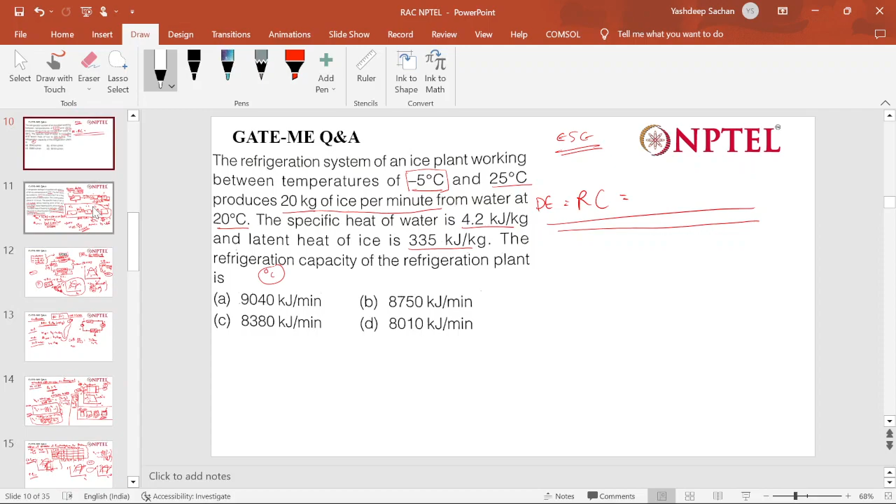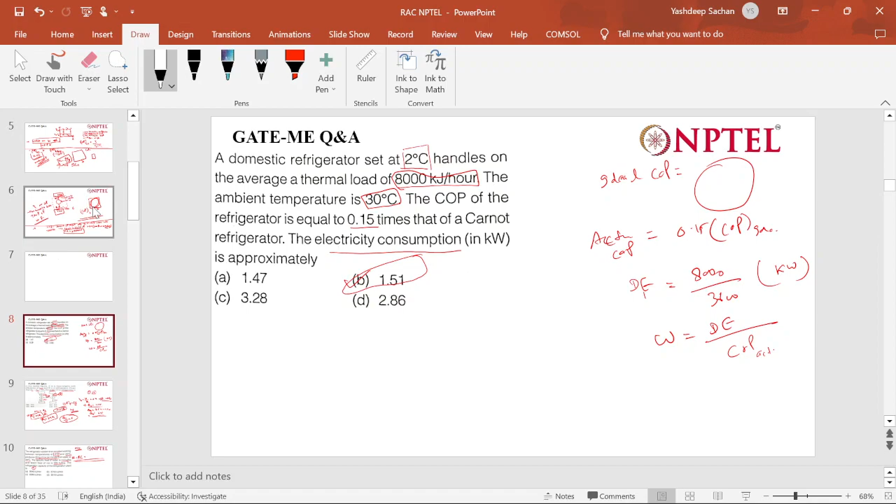Okay, so I will try to summarize quickly. So in the first three classes, what we have done in RAC: in the first class we started with the basics of refrigeration, then saw the Carnot refrigeration, ideal refrigeration cycle, and solved a few problems based on the refrigerator. Then the heat pump coupled with the refrigerator; that problem we solved.

After that it comes to the vapor compression refrigeration system, and there we have seen first the components of the refrigeration system, then the volumetric efficiency and why it is required, the effect of various process parameters on the performance of the VCRS cycle, then the regenerative heat exchanger in the vapor compression refrigeration system, and we also solved one numerical in the last class.

After that, this is the cascade system. What is the requirement of the cascade system? Can anyone tell why it is required? To make the large pressure differences. If we require a refrigeration cycle working in a large temperature difference, right, why can we not do it in one go? Volumetric efficiency decreases drastically, because it depends on the pressure difference. We saw here it is a function of the pressure ratio P2 by P1, so volumetric efficiency will decrease.

Today we will be solving one question on the cascade system. In the last class mostly we solved questions based on the VCRS, various types of problems, right? If any problem regarding the last class, you can ask me, otherwise I will proceed for today.

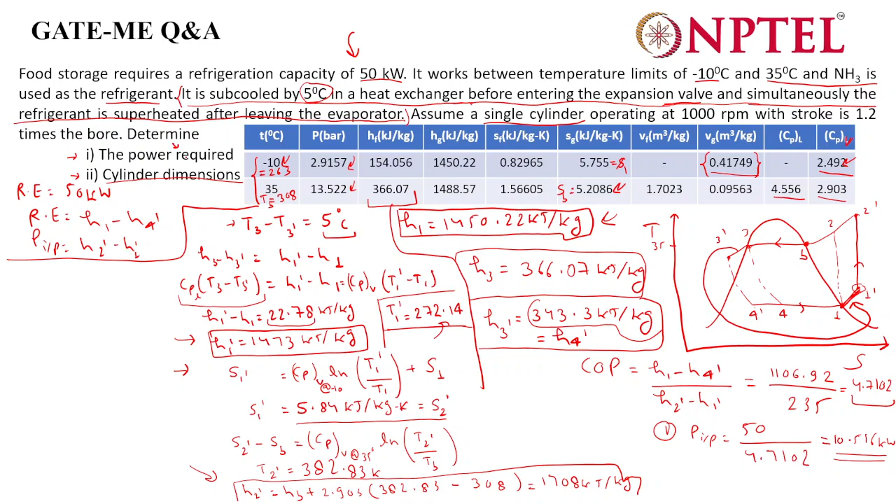In this problem, this is a regenerative heat exchanger coupled in the VCRS. There we found the power required to run the system and the cylinder dimensions. How did we find the cylinder dimensions? We took the assumption that volumetric efficiency is 1, right? Here we took this, m dot we found, and this is the specific volume at the inlet of the compressor, and the relation between the diameter and L is given. So we found D, and with that relation we found L.

Same way here, for the first part you have to take volumetric efficiency as 1. Okay. And here the clearance volume is 3% of the stroke volume. What is the meaning of this? Clearance ratio, sir. Clearance ratio C is given, right? So has anyone solved this problem? Anyone tried? Can you raise your hand?

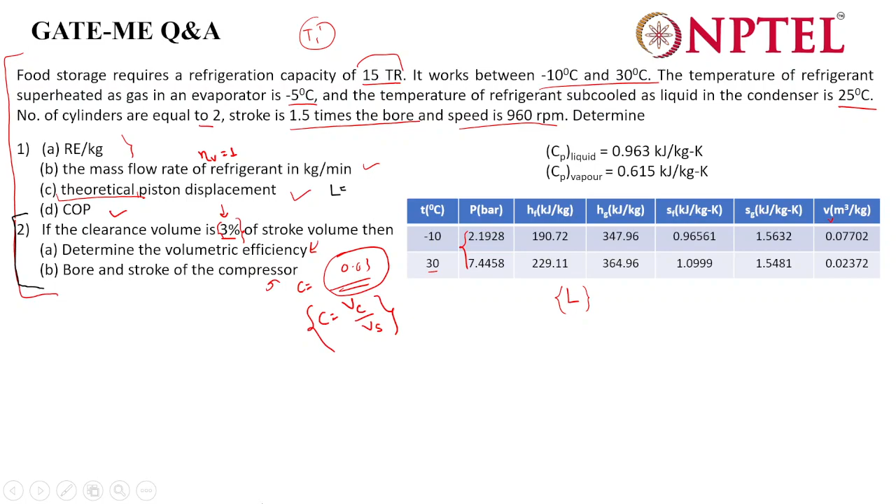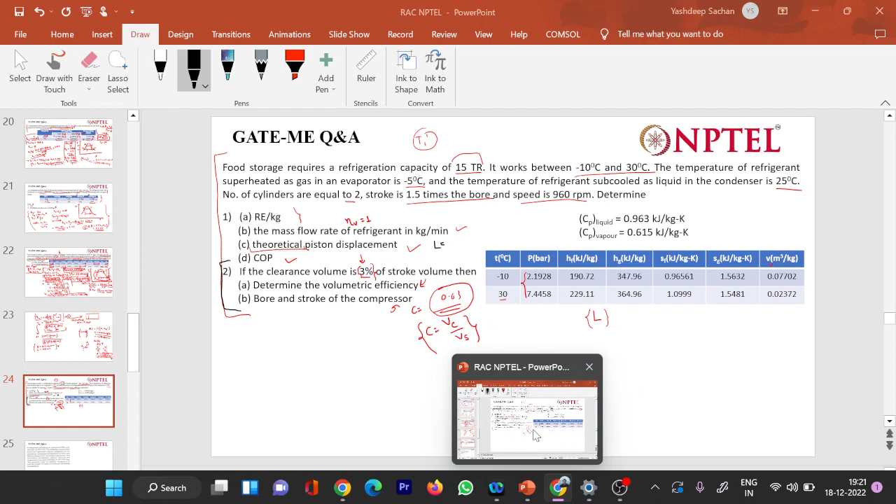So, has anyone found anything? Yes, sir. Okay, so in the first part you take volumetric efficiency as 1, and in the second part you have to find the volumetric efficiency first, because the first question is that only, and then proceed in a similar way. Should I do this problem or will you try, because it's the same problem we did here? We will try, sir.

Your doubt is what the theoretical displacement is, right? Yes, sir. If you take volumetric efficiency as 1, that is the theoretical case, the ideal, but that is never going to be possible. Sir, refrigeration effect per kg means? It means for unit mass. Simply, if this is the cycle, let's suppose this is 1 and this is 4, 2, 3. Then it is simply H1 minus H4, taking the mass flow rate as 1. Okay.

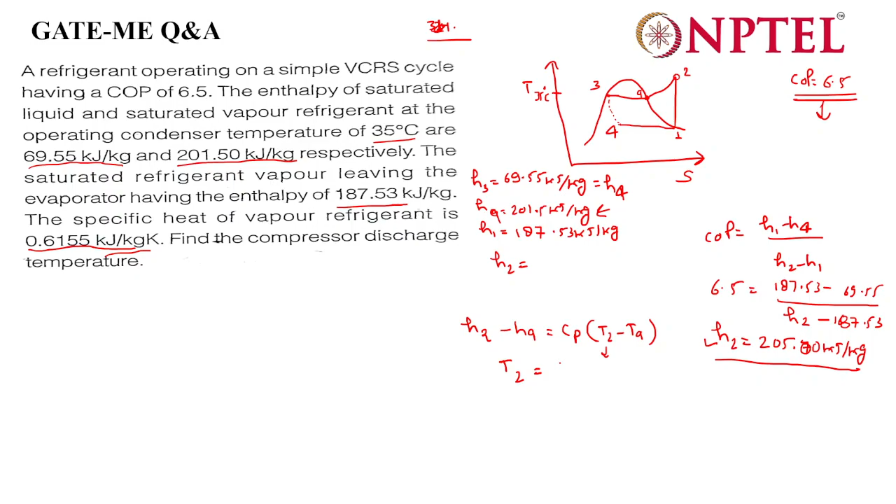314.793. Degree Celsius first tell, because we are going to put this in degree. Either you are putting in Kelvin, then Kelvin you can get. 314, sir. Kelvin. 4.8 I think, yeah. 0.8 Kelvin.

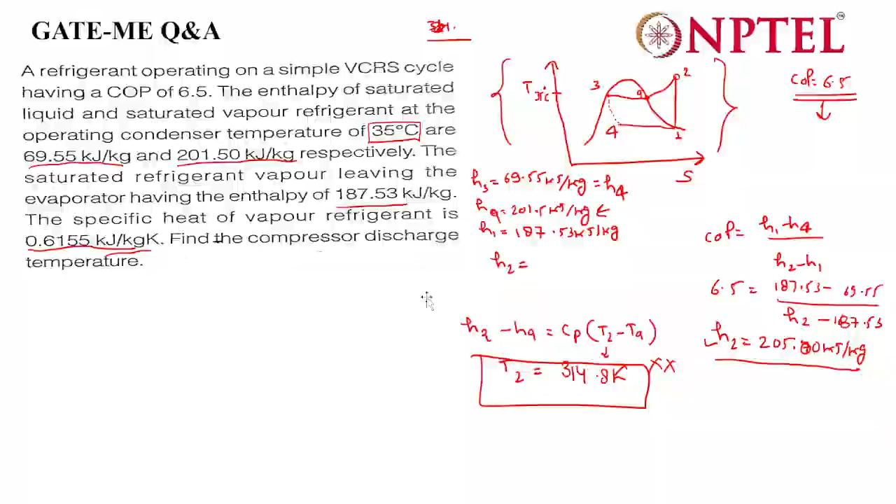So if someone is not able to get how we are proceeding, I think this is a simple problem. This way only the problem is going to come. Okay. Is it clear to everyone? Yes, sir. If anyone is having doubt, let me know. Okay. So should I go to the next problem? Yes, sir.

Just read the problem. Is there anyone who doesn't know what the cascade system is? Then I will repeat it, then we'll solve. Otherwise, this question will make no sense. One time explain it, sir. I will explain what is the cascade refrigeration system, then you try to solve this problem. Okay? 5 minutes it will take, because otherwise it is very difficult to solve it.

So first thing, volumetric efficiency. What is volumetric efficiency? 1 minus C times (P2 by P1 to the power 1 by N minus 1). This C is the clearance ratio Vc by Vs, and P2 by P1 is the pressure ratio. P1 is the lower pressure and P2 is the higher pressure, to the power of 1 by N. N is the polytropic constant. If it is an isentropic process, then it would be gamma.

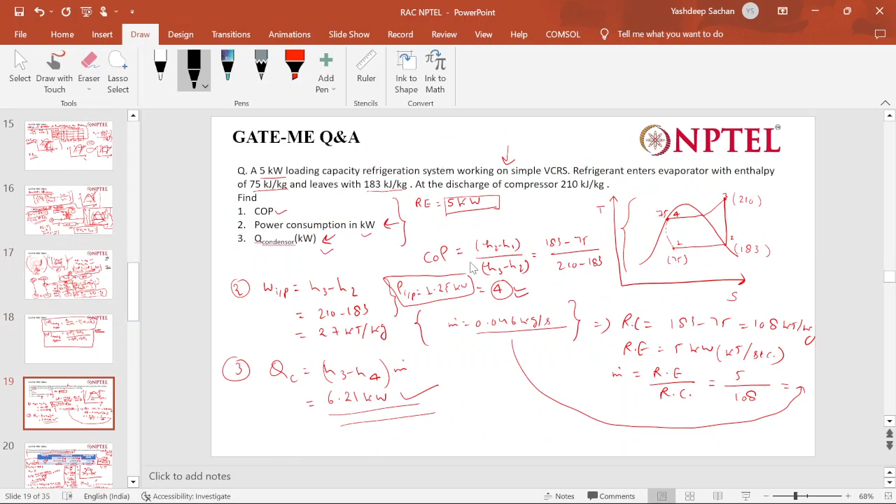Now what will happen if we require a cooling system between a very large temperature difference, let's suppose from minus 50 degrees Celsius to 40 degrees Celsius? It is a large temperature difference. In the property table of saturation pressure, at minus 10 degrees Celsius approximately 3 bar pressure is there. At 30 degrees Celsius, approximately 13 to 14 bar. So if you take the ratio, close to 4 will come.

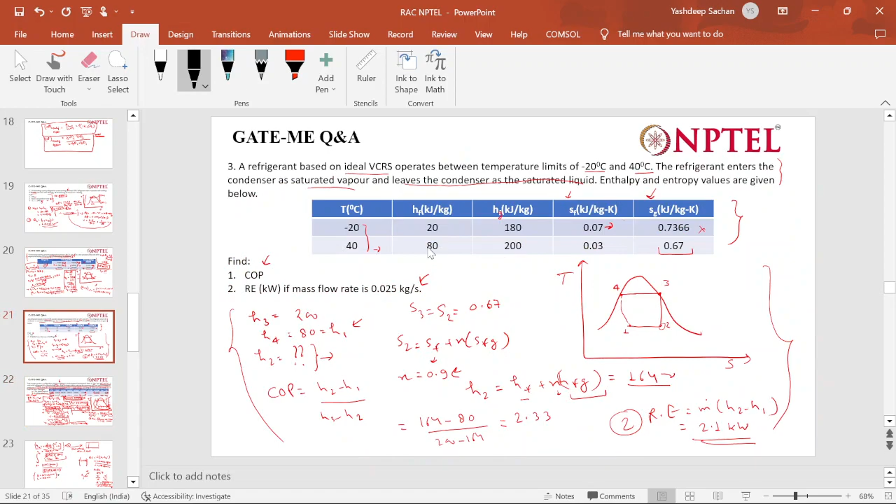And when this temperature goes to minus 40 degrees Celsius, this pressure would reach 0.5 bar. Then this ratio would be very high. In the volumetric efficiency you have to put that ratio, and then volumetric efficiency will decrease drastically. At some point volumetric efficiency would be even zero. That we don't want, otherwise no cooling would be there. So in order to avoid that, we will divide our system in two phases: let's suppose one to minus 10 degrees Celsius, and then minus 10 degrees Celsius to 40 degrees Celsius. Two parts will do the refrigeration. Is it clear?

Yes. Not clear, I will repeat some important part again. If anyone is having a doubt, let me know, then we'll start that problem. So here, simply, we are dividing one refrigeration system into two refrigeration systems. One from minus 42 to, let's suppose, minus 10 degrees Celsius, and minus 10 degrees Celsius to 40 degrees Celsius, instead of going from minus 42 to plus 40.

Clear? Is it clear to everyone? Hello. Okay, sir. So now, keep this formula in your hand. Take a screenshot of it. If you are remembering it, then it's very good. If not, then keep a screenshot of that.

Because what is the COP of the overall system? COP of the overall cascading system is COP1 into COP2 divided by 1 plus COP1 plus COP2. So what is COP1 and COP2? COP1 is the refrigeration effect at the lower temperature to the work given to that pump, and the COP of system 2 is the refrigeration effect at the higher temperature to the work given to that system. So this is COP1 and COP2. Okay.

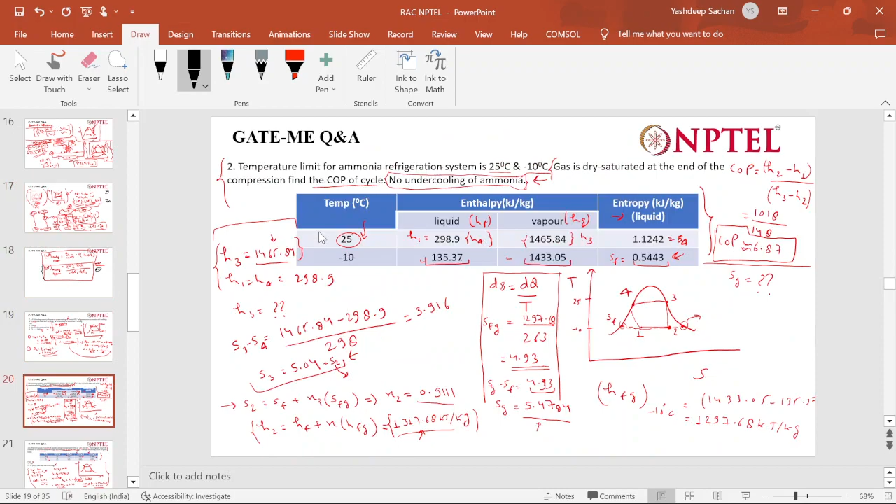So can you try this question? Just first read. Let me know what would be the refrigerant at lower temperature and what would be the refrigerant at higher temperature. Just let me know that, then we'll start. Can you try, or should I start? At lower temperature, it is ammonia, and at higher temperature, it is CO2. Sure. Yes, sir. Just read again.

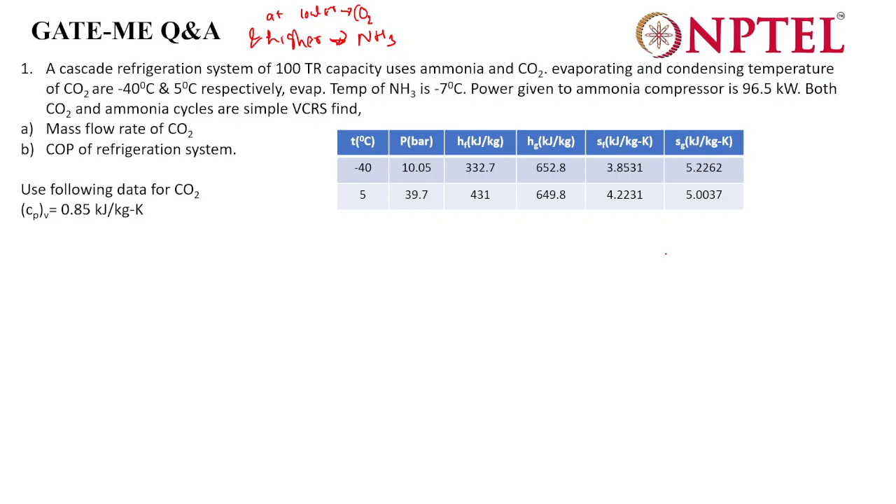Oh, sorry. It is minus 7. Now it is reversed, sir. Hmm. Okay, so you are saying at the lower temperature it is CO2, and at higher, ammonia, right? Yes, sir. Okay. So I will start. You will also solve simultaneously. So in the cascade system, let's suppose we are dividing it in two parts. One is this.

So what is given? A cascade refrigeration system of 100 TR capacity uses ammonia and CO2. Evaporating and condensing temperatures of CO2 are minus 40 degrees Celsius and 5 degrees Celsius. So if this data is not given, you can get it from here. Evaporator temperature of ammonia is minus 7 degrees Celsius. Power given to ammonia compressor. From here we have decided that at lower temperature CO2 will be there and at higher temperature ammonia would be there. How have we decided?

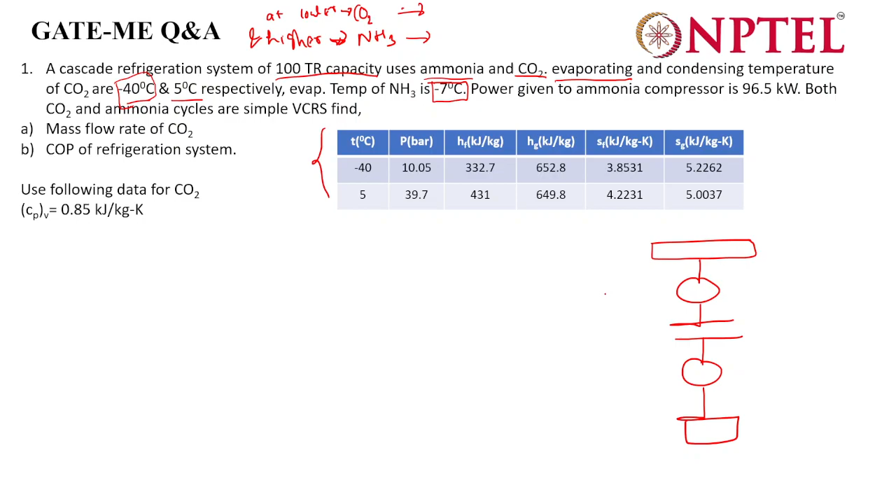Here it is given the evaporating and condensing temperature of CO2. What is the evaporating temperature of CO2? Minus 40 degrees Celsius, right? And here it is given the evaporating temperature of ammonia is minus 7 degrees Celsius. So which would work at lower temperature? CO2, right? Hello. Yes, sir. So the lower system would be of CO2 and the upper system would be of ammonia. It is required to know which system is which.

Why? Because it is given the power given to the ammonia compressor. If you don't know which is ammonia and which is CO2, then to which compressor would you give this power? So now we are sure the power would be given to this compressor. It is 96.5 kilowatt. Both CO2 and ammonia cycles are simple VCRS. Now, okay. So this temperature would be minus 40 degrees Celsius.

So the mass flow rate of CO2 we have to find, and the COP of the whole refrigeration system we have to find. So will you try or should I start? If you want to try, then I can give 2 minutes and then I will start.

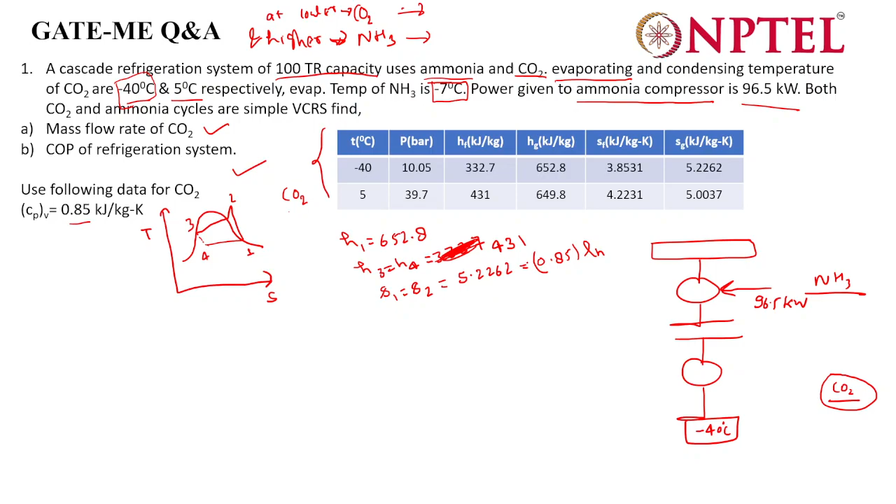So H2 is remaining. How will you find H2? First you have to find the temperature at 2, means S1 is equal to S2 is equal to what? What is S1? 5.2262, right? 0.2262. So Cp of vapor is given for CO2 is 0.85. See, is it clear to everyone how I am doing this? I don't think I have to repeat all formula each time. So it is simply... 1 minute. 278.

So this is the entropy at point 2. So entropy difference of this, let's suppose this is A point. What would be the S2 minus SA? It would be Cp of V ln T2 by TA. So here SA you are knowing, SA would be this value, right? Sg at 5 degrees Celsius would be the SA. So S2 you know, S2 is this, SA is this, Cp 0.85 and TA would be what? 278 Kelvin, right?

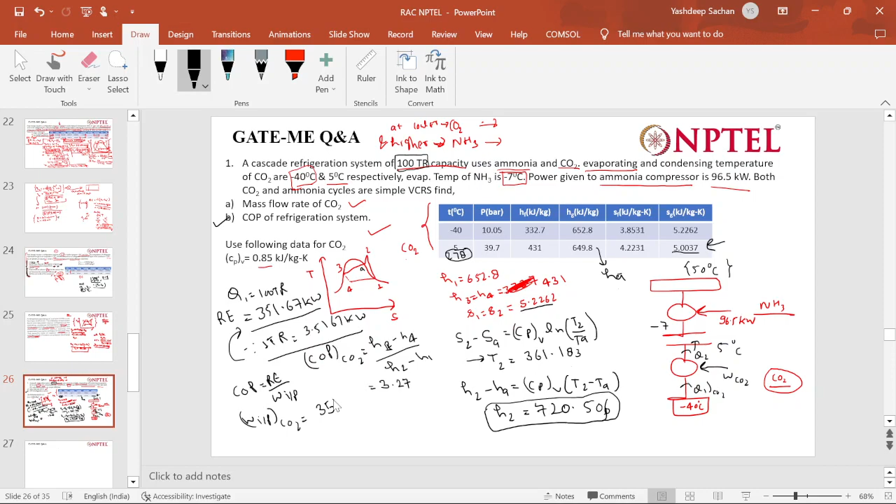Then you know the refrigeration effect. Refrigeration effect is how much? This one, right? For the CO2. So you can get the work. What is the COP formula in general? Refrigeration effect by work input, right? So can you get work input from here? What would be the work input? 351.67 by 3.27.

So can you let me know this value? How many kilowatts will it come to? How much? 107.35. 107.35. Is it same for everyone? One minute. Sir, if we calculate COP with the help of temperature limits, then will it be true, sir? One minute.

Yeah, now tell, what are you saying? Sir, if we calculate COP with the help of temperature limits, that is 5 degree and minus 40 degree Celsius,

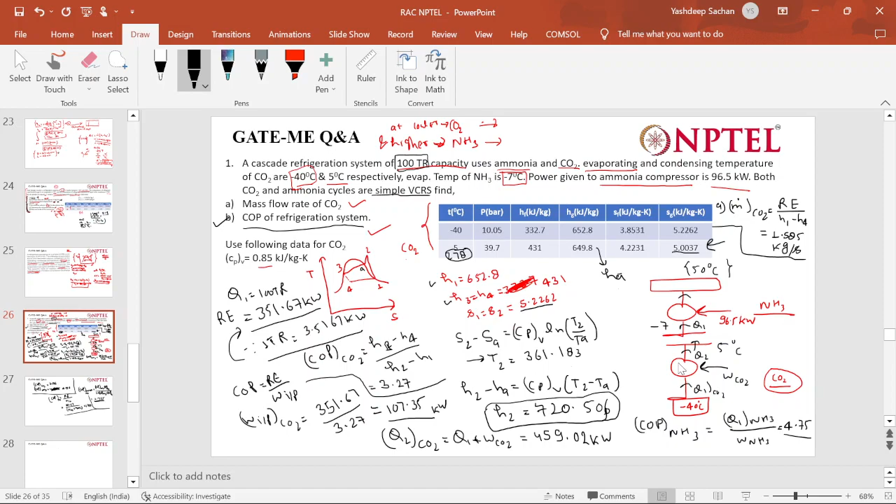Hello. Okay, so one problem we have done on the cascading system, and one problem on that regenerative heat exchanger in the VCRS. That one problem we have done. So this problem is actually very important.

So if here you don't know clearly what is the refrigeration effect in regenerative cycle, there you may commit mistakes. Lot of places where you can commit mistakes. Okay, for what would be the refrigeration effect? What would be the compressor inlet? So that you have to see. So if this you have done, then it is okay, I think.

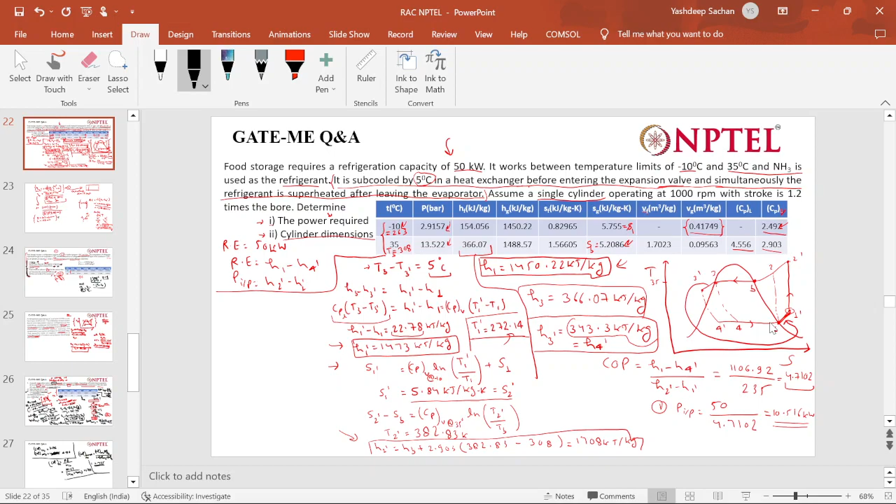Otherwise others are simple. So for this problem I would give the answer to you in 1 minute. So for the refrigeration effect per kg, here I'm writing the answer. One, if answer is not matching, then next class we can solve. Okay.

126.74 kilojoule per kg, and mass flow rate of refrigerant per minute, 126.74. Second answer will be 24.972 kilogram per minute.

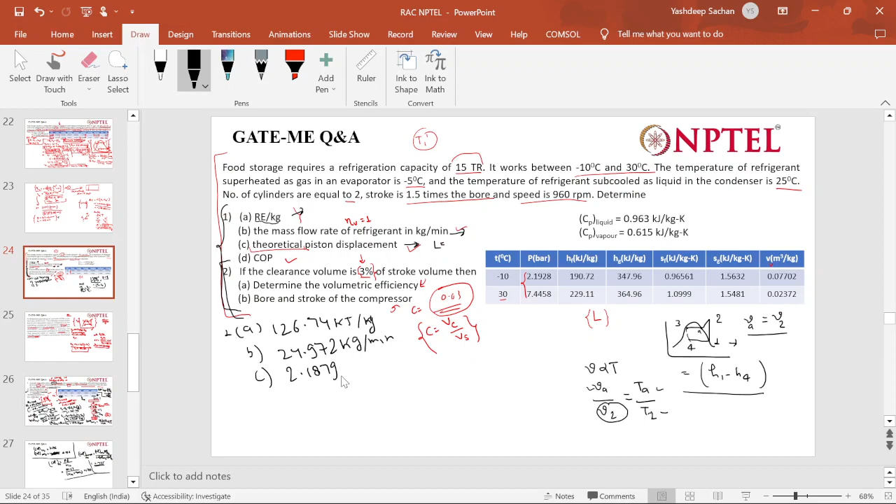C would be the theoretical piston displacement. It is coming in liters. So the volume they have given, 2.1879, and COP of the system is 5.72, 5.73, yeah.

And okay, here it is in this way. So dimensions you can also find. I think some relation they have given, stroke to bore. So dimensions are D is 95.33 and L is 143.

So in second problem, if you take the clearance ratio, then volumetric efficiency is coming. Anyone calculated what volumetric efficiency you are getting? 94.26%. Here it is coming 93 point, sorry, 93.49. So it is okay.

Anyone calculated bore and stroke? Have you calculated? 95.18. Here diameter is coming 97.56 mm, and length is 146.34.

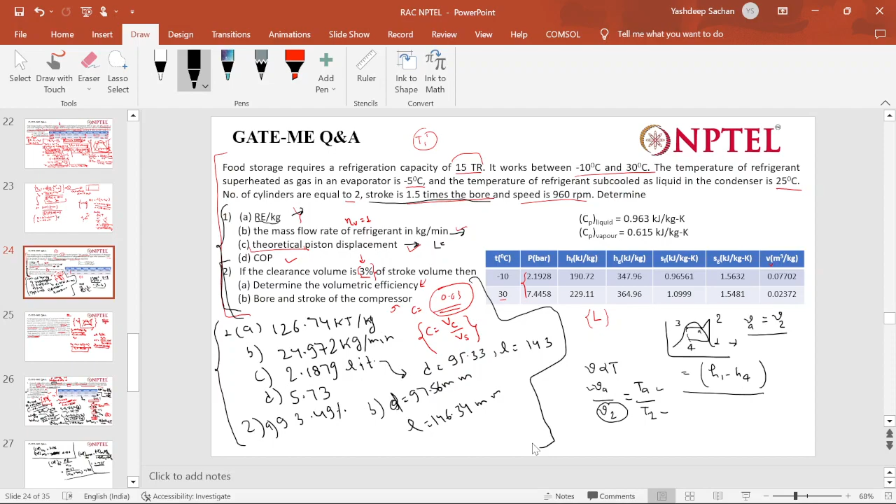Hello. Yes sir, it's clear. Okay, so today we will start the theory of the vapor absorption refrigeration system.

We'll do that later. So today we will be doing something else. Can anyone tell which refrigeration cycle is the Brayton cycle? Do you know? Yes sir, reverse Brayton, we know.

And which processes are there? Isentropic and constant pressure, isobaric process. Okay, two processes are at constant pressure and two processes are isentropic. Okay, Brayton is okay. Then if two isentropic processes are there, but we change the constant pressure processes to the constant volume process.

Then which cycle will it become? Otto. Okay, if we change both of the constant volume processes to the constant temperature process, then which cycle will it become?

Carnot cycles, not cycle, right? So can anyone know what is Stirling and Ericsson cycle?

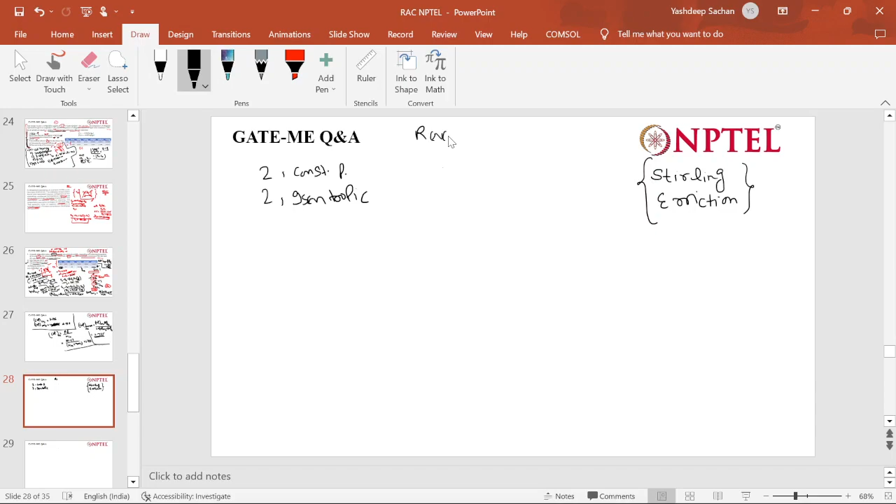So we are in the refrigeration system, so we are going to see the reverse Brayton cycle. So what is the application of the reverse Brayton cycle? Air refrigeration cycles.

Applications - aircraft. Can anyone know what is the other name of reverse Brayton cycle? Reversed Joule cycle, Bell-Coleman cycle. Okay, so this you sometimes say Joule cycle, you sometimes say Brayton cycle.

Can anyone tell what is the difference in both? Both are same, sir. Is there a working fluid difference, sir?

Okay, if anyone knows, let me know, otherwise I will tell. Brayton cycle is closed cycle and Joule is open. Joule cycle is open cycle - here you are taking each time fresh fluid, fresh air, and in Brayton cycle same air would keep on circulating. Okay.

Sir, I don't know about Joule cycles. Nothing, I will make it here, then you will know. Simply, like in 1 minute - in this you can't get it, I will draw that.

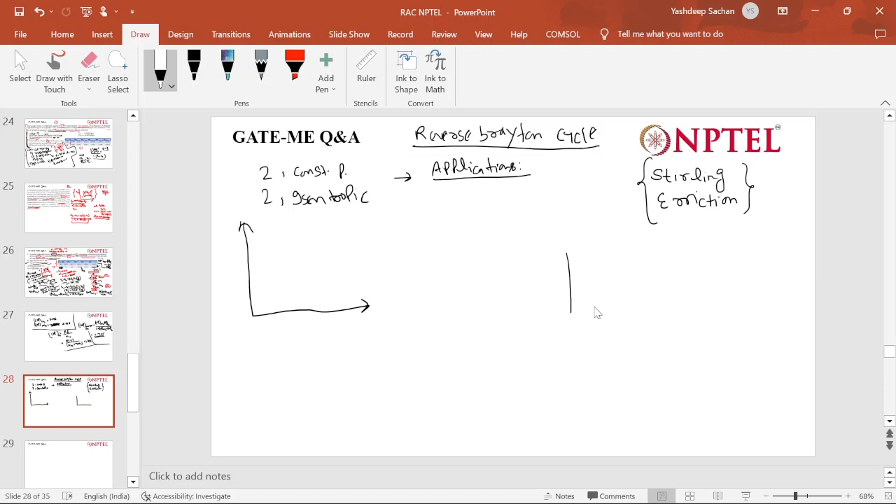Brayton cycle you know, right? Yes, sir. Okay so I was in the application, sorry. So when I will be making the block diagram, that time I will let you know which cycle becomes Joule cycle and which cycle becomes Brayton cycle. That time I will explain.

So okay, application of this - one is the aircraft refrigeration system. And any other application can you let me know? One is gas liquefaction. So TS diagram and PV diagram for this will make.

What is this process? Heat absorption, Q absorption. And what is this process? Constant pressure heat rejection. And here, W input, and here some work you will be getting.

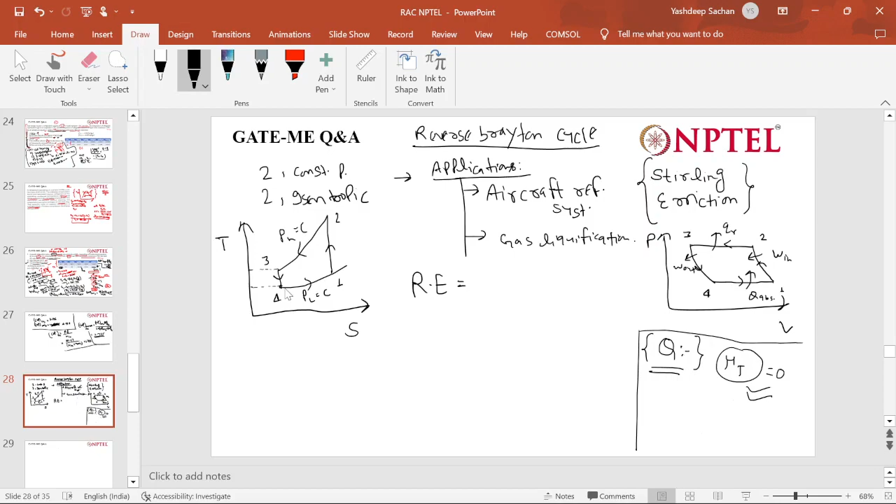Okay, first I will let you know. This would be the inlet of same cycle, same as VCRS. This is the inlet of evaporator, and this would be the exit of evaporator. This is the inlet of compressor. This 2 point would be the exit from compressor, and from two would be the inlet of condenser it will go, and 3 is exit of condenser, 3 entry of turbine here. There entry of expansion valve or throttling valve. Here inlet of turbine, and 4 is the exit of turbine.

Now naming of each is clear or not? I am running a bit fast because it is same as the VCRS. Please repeat once, sir, naming? Okay, 4, what is the 4 at the VCRS? Entry to evaporator. Entry to same. One is also same, exit to evaporator, and one is entry to the compressor in both cycle, right?

Yes sir. And 2 is the exit of the compressor and entry to the condenser. Okay sir. And 3 is exit to the condenser and entry to the turbine. Entry to the turbine in Brayton, and entry to the expansion valve in the VCRS. And 4 is the exit of the turbine and entry to the evaporator. Is it clear now?

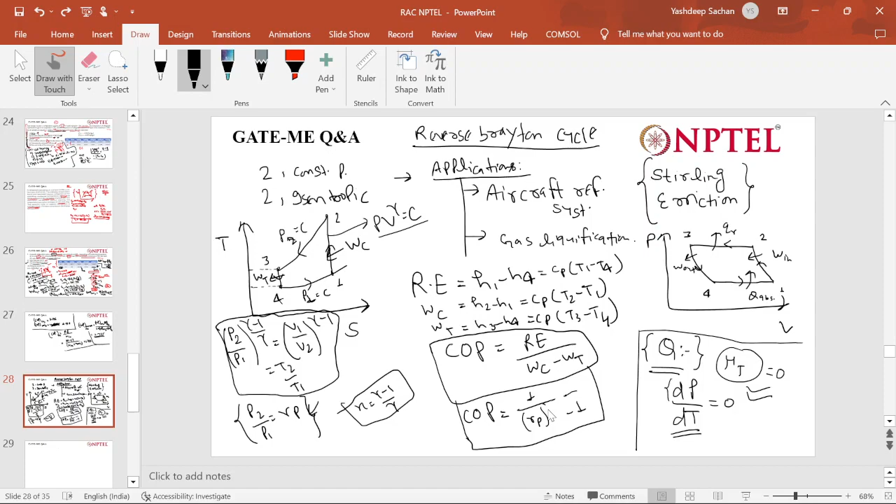Sir, that formula for COP, 1 minus 1 upon RP raised to that term, is for the COP of the Brayton cycle? COP of Brayton cycle is, one minute. Okay, this is gamma minus 1 over gamma. This is the power actually. This is not working properly today.

I was asking, sir, the COP of the Brayton cycle and the COP of the reverse Brayton cycle are different. No, COP of Brayton cycle? The Brayton cycle is what? The Brayton cycle is a work producing cycle, right? Yes, sir. So why would you find COP there? Okay, sir. Got it. It is efficiency, sir. There you will find efficiency, no? RP to the power x it would be here, right? So this is the theoretical one.

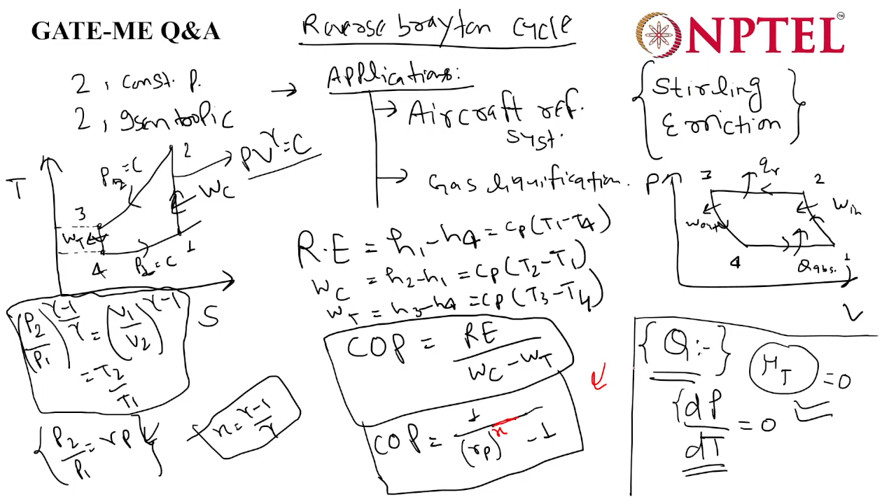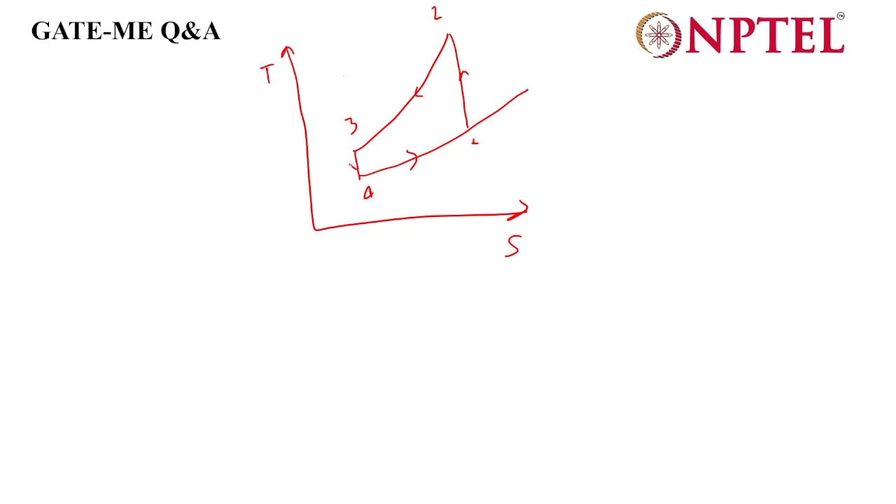Now, actually, what will happen? One example I will tell, and then we'll stop for today. Next class we will solve problems on this. Let's suppose these are the processes: 1, 2, 3, 4. Now, this is the ideal one. Here the COP you can find as 1 by RP to the power x minus 1.

Now, what will happen in the real process? Some compressor efficiency would be given to you, so it will go this way. Sorry, why did it not go this way? So let's suppose this is 2 dash, and here it will go this way, 3 dash. So now 2 dash and 3 dash you have to find, right? It is the real process.

In a real process, they will give, like, the efficiency of the compressor is 0.85 and the efficiency of the turbine is 0.9. So you will be calculating the temperatures at 3 dash and 2 dash. Can you calculate? Yes, sir. So keep those in mind. Also, regeneration can be done here. We'll see how those problems can be, and we will be doing them. Mostly the theory of this is done. So one thing I can also make.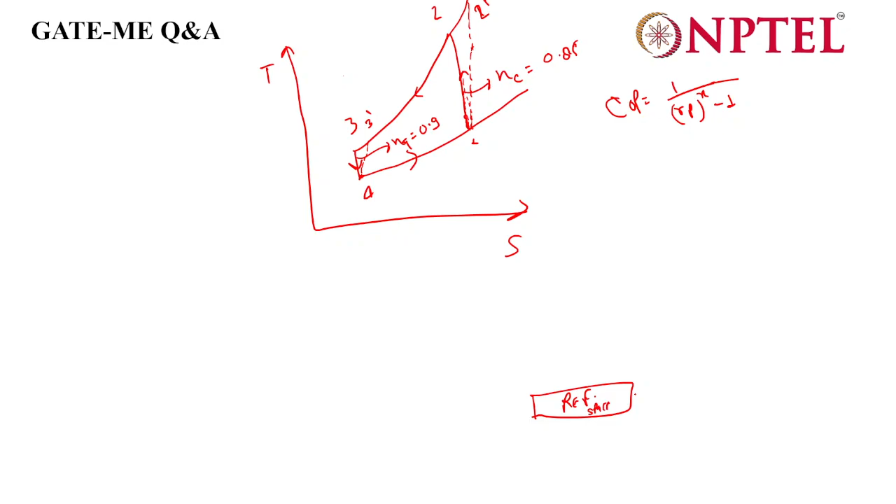Let's suppose this is the refrigerated space, and from here it will go to, let's suppose, the compressor. And from here it will go to, you can say a cooler or a condenser, both are okay. Cooler we will say.

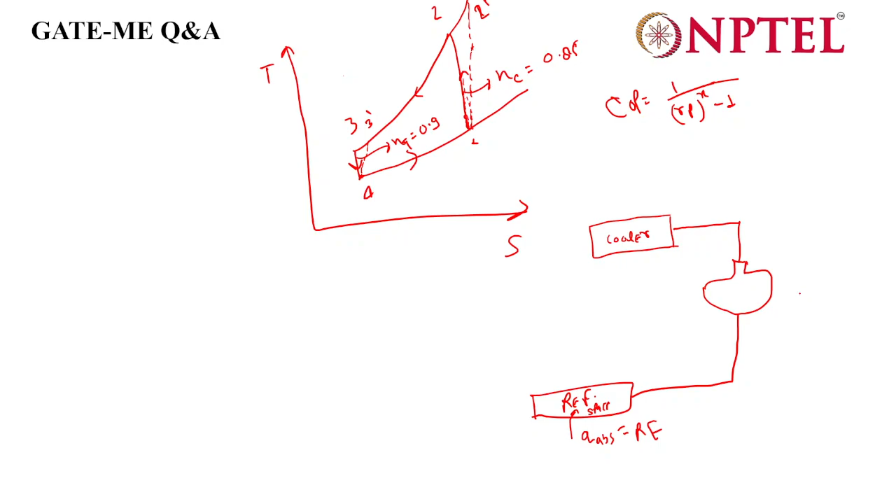From here it will take some heat absorption, or refrigeration effect we can say, and here we would be providing some compressor work, and it will reject heat here. Now after this it will come here, and the turbine would be there. Oh, sorry.

Okay, this is a piston system. Simply, it is getting work, W of turbine. So I want to show a piston-cylinder arrangement, so we would be getting some work. If now, after the turbine, you are exhausting this air to the atmosphere, and here again you are taking new air from the atmosphere. Okay, let's suppose this is the surrounding.

If you now exhaust this to the surrounding, then which cycle will it become? Joule cycle. This time it will become the Joule cycle, because it is an open system, not a closed cycle. So it will again suck air from the surrounding, absorb heat from the refrigerated space, go to the compressor, cooler, and the turbine. Turbine work will be taken and it exhausts to the surrounding.

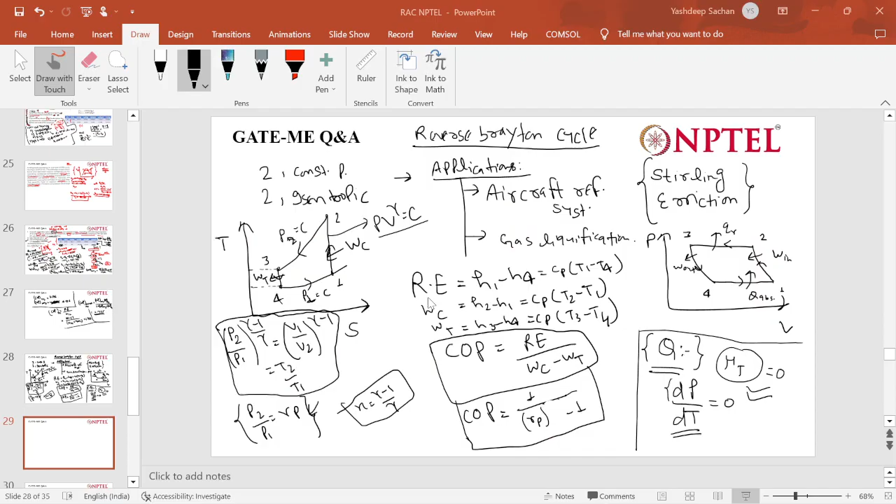Okay. So one system I am taking. So let's suppose for this system currently we are going to give some heat to it. Okay. Hello. Yes, sir.

And here I'm thinking it is internally... Do you know internally reversible? Internally irreversible. Yes, sir. Due to the molecular friction. So first I am taking this system is internally irreversible. Okay. So what would be the total entropy of system?

One is the delta S due to the internal irreversibility. Internal irreversibility I, okay, I will write internal irreversibility plus Q by T. Q by T, you are getting what is Q by T? This is due to the interaction of heat with the system. Hello. Yes, sir.

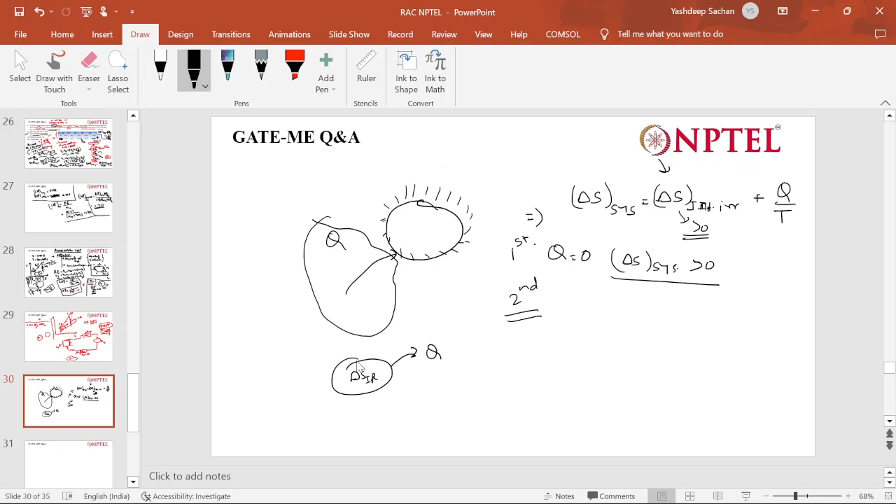Delta S of internal irreversible, I am writing IR. Okay. Delta S IR is there, and heat from the system. This is system. So what will be the net delta S of system? Delta S IR plus Q by T. Actually it is plus dQ by T, but as of now I am writing Q by T. Okay.

Sir, value is minus Q by T, sir. Heat rejected from the system. Okay, sign I will take, minus Q. Heat rejected by the system we will take as minus. Okay. Hello. Yes, sir. So let's suppose delta S of internally irreversible is positive, let's suppose 0.01. And now heat rejection from the system means it is negative, minus Q, right?

Yes, sir. So let's suppose this is our body at constant temperature, a thermal reservoir. Taking some heat out will not change the temperature of that body, right? Yes, sir. So some heat would be going out, but that heat we will adjust such that Q by T would be minus 0.01. Got the thing?

Yes. So what would be the net delta S of system? It would be 0. So this process is also isentropic. Correct or not? Yes, sir. And the next case, third case I am taking. Third case is, 1 minute.